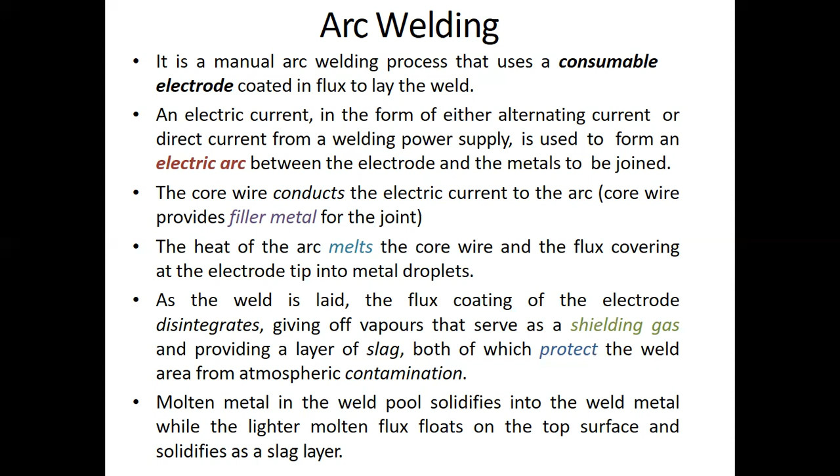That molten metal of the core wire solidifies into the weld metal, and the lighter molten flux floats on the top. Because the weld metal is dense, it will come down. The flux will stay at the top because it is lighter, and it solidifies as a slag layer. So that can also be removed later if required. Okay.

So to summarize what you have learned so far, arc welding is also known as stick welding. That is another point to note. It is called stick welding because we are basically using a stick, an electrode. It uses an arc between a covered electrode and a workpiece. That's what we have discussed.

The arc is between the electrode, which is covered with flux, and the workpiece. One is positively charged and the other is negatively charged. Shielding is obtained from decomposition of the electrode cover, that is, the flux. And pressure is not used. We are not using any pressure, are we? No. In this particular arc welding process, there is no pressure used at all.

Because in the definition of welding, we have seen with or without use of pressure, remember? So we are trying to emphasize that no pressure is used here in arc welding. Other point is filler metal is obtained from the electrode itself, right? The electrode has a core wire that is basically the filler metal around which you have the flux, right?

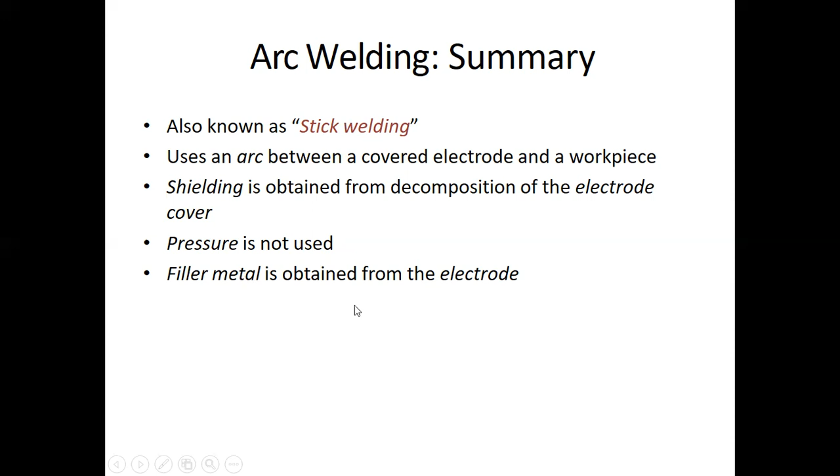You see the principle of arc as we have explained already, we have seen a suitable gap is kept between the workpiece and electrode. That is what the responsibility of the welder is. That he has to maintain a certain gap so that arc is generated, right? How is that arc generated? Because of the high current that is passing through the circuit. What is the circuit?

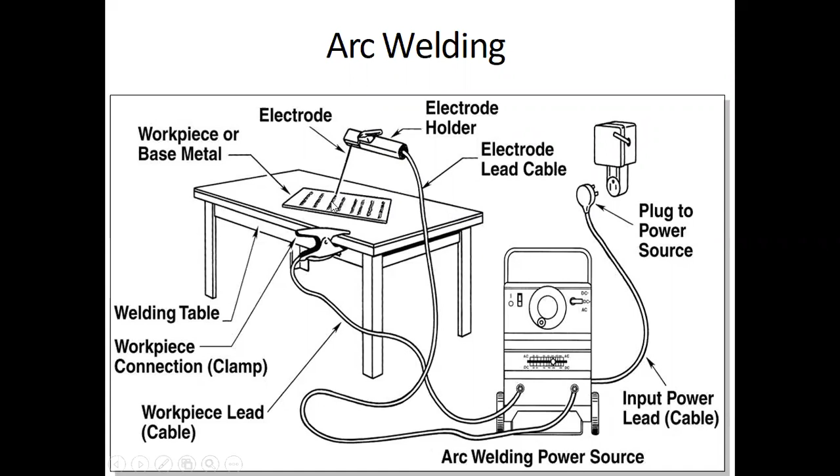Your electrode, from the electrode to the workpiece, right? From positive to negative end, right? The current has to pass. So to close the circuit, you have to ensure that that gap is maintained, right? If the gap is there, to close the circuit, the current has to jump, right, from that electrode to the workpiece. That's what the circuit means here.

High current is passed through the circuit. The electric energy is converted into heat energy, right? Producing a temperature of 3000 degrees centigrade to 4000 degrees centigrade. That's the temperature that is achieved because of the arc. Okay, this heat melts the edges to be welded, right? And molten pool is formed. On solidification, the welding joint is obtained, right? That's the principle of arc, and basically the summary.

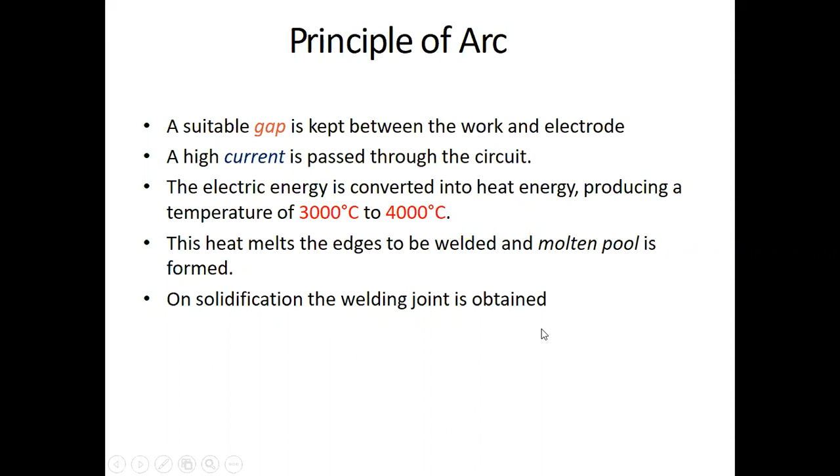A closer look at the arc welding process, you see, this is your electrode. As I said, the surface is your coating, flux coating. The inside is your core metal, right, filler metal. And you see here, arc is formed here. This is your base metal. The arc is formed between the electrode and the base metal. And this molten weld metal, the core wire which is inside is responsible for supplying this molten weld metal, right? And even the base metal would also melt.

Two things. Okay. Here you see they are going from left to right. So this is already welded. You have solidified weld metal, right? Basically this filler metal is also there and this base metal is also mixed. And on the top you have slag, as we have discussed. The slag is because of the flux. Because it is lighter, it floats on the top. And the denser weld metal is there at the bottom. Right? That's the travel direction. That's what is there in this diagram.

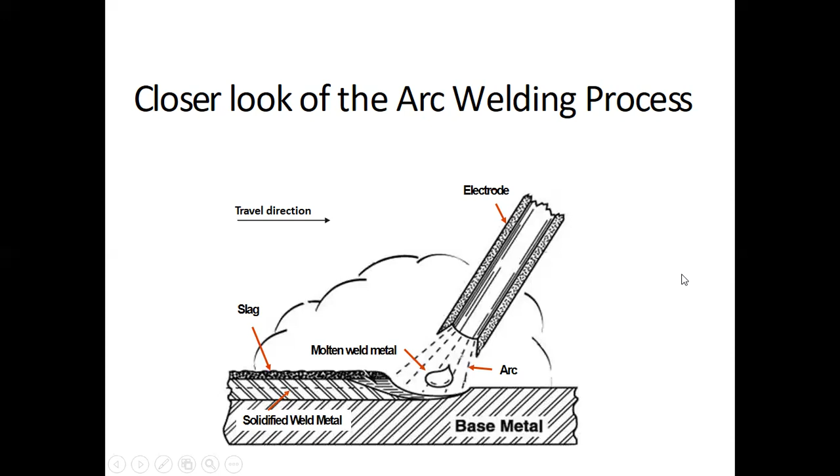The process, as we have discussed, intense heat at the arc melts the tip of the electrode. Tiny drops of metal enter the arc stream and are deposited on the parent metal, right? It's a base metal. As the molten metal is deposited, slag forms over the bead, which serves as an insulation against air contaminants during cooling, right? They will remove the slag upon complete returning to the room temperature. Until that point, it serves as an insulation against the contaminants in the atmospheric air.

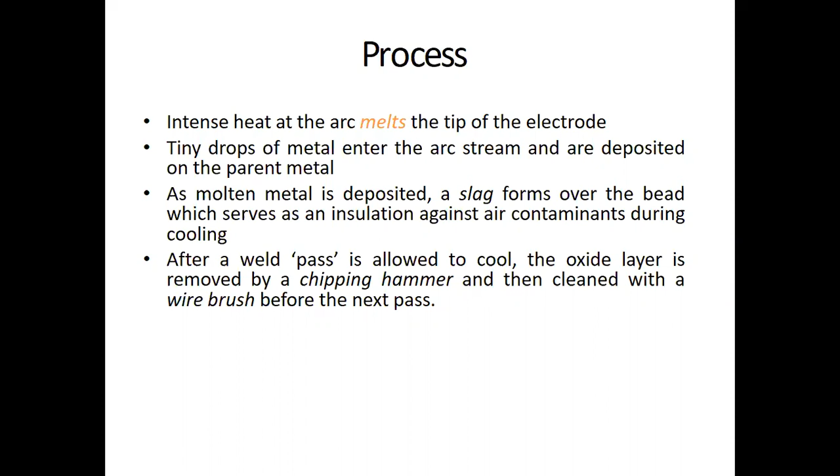So after a weld pass is allowed to cool, the oxide layer is removed by a chipping hammer. The technical name for that device used to remove the slag is called chipping hammer, and then cleaned with a wire brush before the next pass, right? We'll see the equipment also, you see here, arc welding equipment. You have the welding transformer, which supplies the current, right?

We have the electrode, this is what the electrode looks like. You can see the tip is only the weld metal, whereas most of your electrode is basically flux plus metal. At the end, you have the metal where it is being clamped in the electrode holder, right? You see, this is the point where it will be clamped in the electrode holder. This is your electrode holder, needless to say.

This is where the welder will hold the electrode holder, right? So this will be insulated of course, for the protection of the welder. Workpiece clamp, right? As I said, for connection between the workpiece and the transformer. This will serve as a grounding, right?

Protective shield for protection of the welder from the contaminated gases that are formed. Wire brush, as we have discussed just now, to remove that slag. Chipping hammer: you use the chipping hammer first to remove the slag, and then the wire brush also.

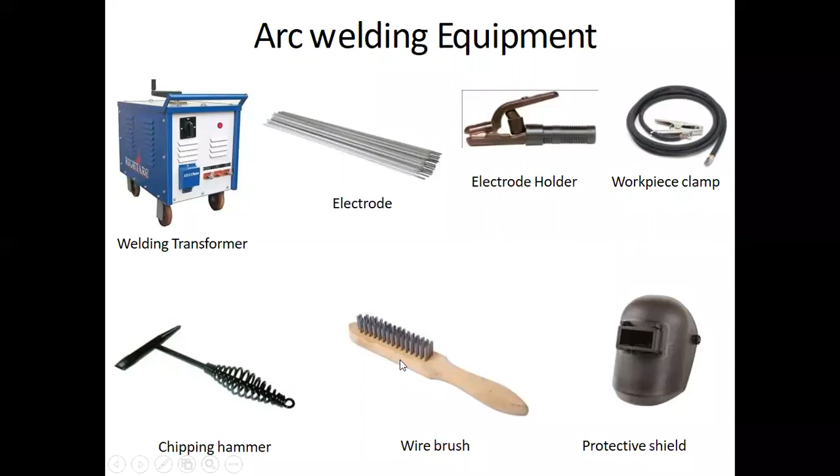Steps. What are the basic steps? You prepare the base metals, you remove the paint and rust. Why? Because if the weld metal also has these contaminants, they will serve as impurities. So it's better to remove any paint or rust or any other contaminants from the workpiece before trying to weld. Preparation of the base metals.

Choosing the right welding process for your particular application. Different processes are there. You have to select based on the material, the geometry, the cost of the equipment that you can afford. Choosing the right filler material also, what filler material to use. Assess and comply with safety requirements. That is one general rule.

Use the proper welding techniques and be sure to protect the molten puddle from contaminants in the air, because that will serve as impurities and it will lead to heterogeneous properties. The properties will not be uniform all throughout the component. Inspection of the weld at the end.

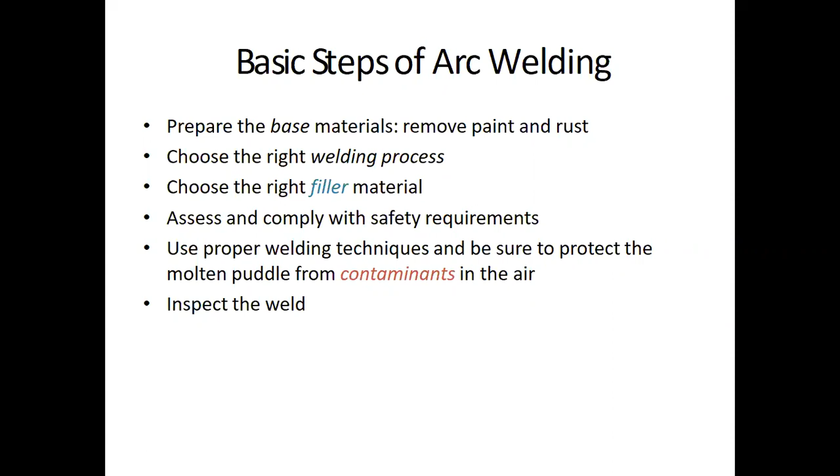So where do you get the electric power for welding? It could be either AC arc welding or DC arc welding. So AC, alternating current: instead of 220 volts at 50 hertz, the power supplied by the transformer is around 17 to 45 volts at current up to 600 amperes. This is for AC arc welding. For DC arc welding, DC machines are made up to the capacity range of 600 amperes and a voltage in the range 45 to 95. So two kinds, either AC arc welding or DC arc welding.

Just a little comparison. As compared to alternating current arc welding, the direct current arc welding has these points. It is less efficient as compared to AC arc welding. Power consumption is quite more for direct current because the current would be stable. It will supply the same current; it will not vary as in AC arc welding.

Cost of equipment is more here. Low voltage, and therefore a safer operation, a positive point of one sort if you look at it from that perspective. Because of the low voltage, this is quite a safer operation. Suitable for both ferrous and non-ferrous metals. Preferred for welding thin sections.

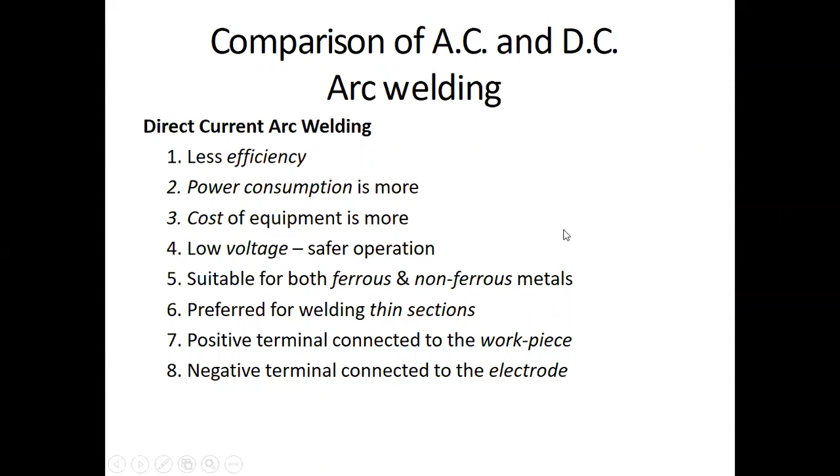Types of electrode. Choice of electrode depends on a number of factors, including these three. Your weld material is one factor. The welding position is also one factor. The desired weld properties after you have got the weld is another factor. So the type of electrode would depend on these three factors, just to name a few.

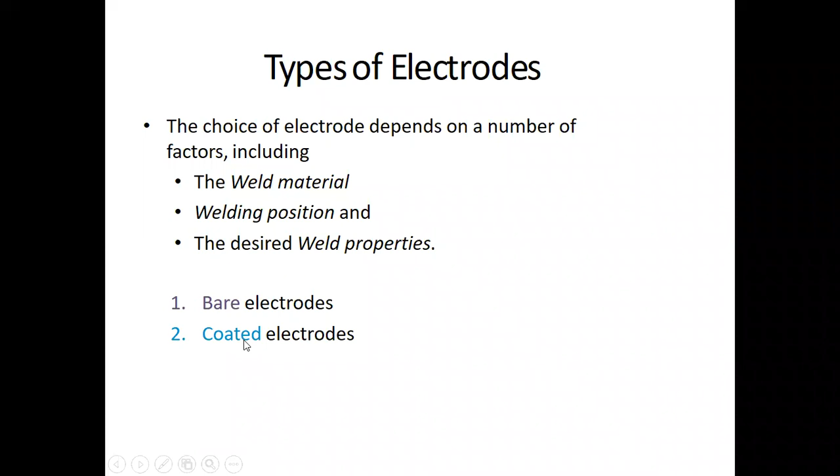So if you look at the category, there are bare electrodes and coated electrodes. Bare electrodes are without any coating, no flux at all. Coated electrodes will have coating. Welding action of a cellulosic coated stick electrode: this is your electrode as we have seen earlier. This is your flux coating. This is where it will be held in the electrode holder.

So we have seen this diagram earlier. This is your slag floating at the top. That's your weld deposited. Projecting sheath or miniature crucible. So this will serve as a protection, a gaseous shield, as we are seeing. This flux is responsible for generating that shield.

We are calling this a miniature crucible because it is basically supplying the molten metal. This core wire is supplying the filler metal. So that is why we are calling it a miniature crucible, because it is supplying the molten droplets.

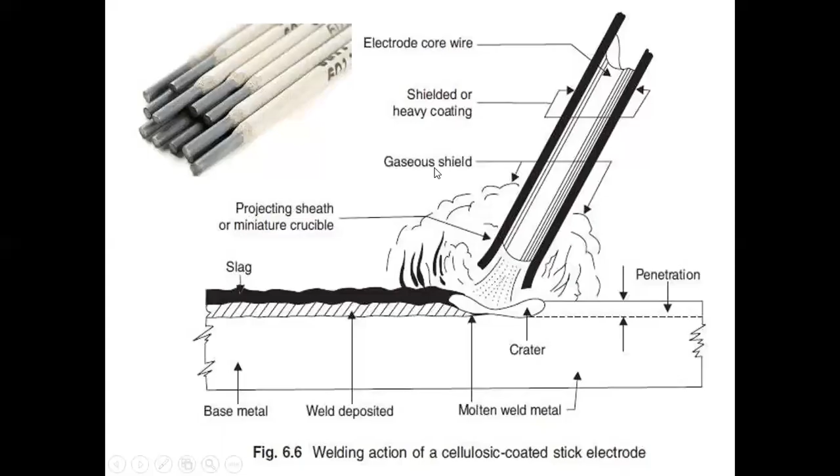Any other thing? Shielded or heavy coating, as we have already discussed, electrode core wire, right? As I called it, core wire, right? Applications, if you want to see, we have, you see the towers that are there.

Cellular towers also have to be welded. Pressure vessels have to be welded, right? You see that pressure vessel in your oil and gas industries and all these food industries, right? So they require this kind of vessels. So they are to be welded, right?

And these are also structures, right? Steel structures, a good example in the context of civil engineering, right? So they're preparing those structures. These are to be welded, right? Those members are to be welded. Cross members are to be welded to this main frame, right?

And automobile, as I said, BIW, the outer body of the car is to be welded at several points, right? And even these pipelines, as we have seen here. If the thickness is quite high, then they will use that type of welding, right? And grills, so this is basically more of a general application, right?

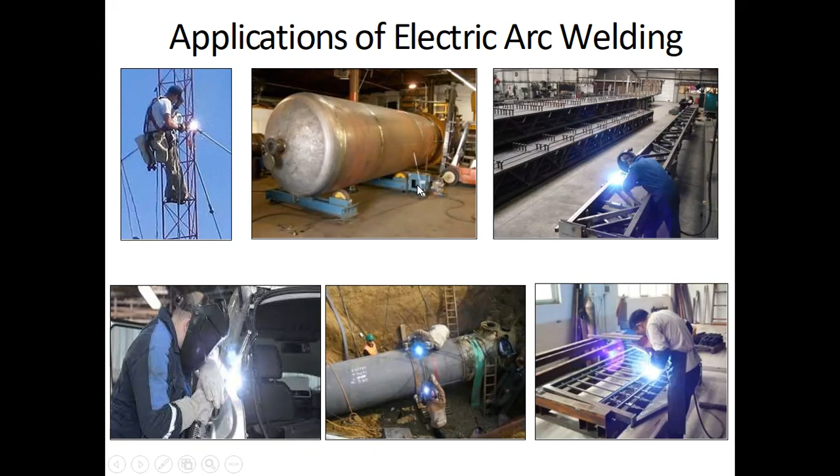The advantages: it's a simple welding equipment, it is portable, even the transformer can be taken from here to there. That's what makes it portable. Inexpensive power source, right? Relatively inexpensive equipment. Welders use standard domestic current, right? The users have to plug in to the power source, right? The process is fast and reliable. So you get that arc as soon as you switch on the power source, right?

It's that simple. It's reliable, short learning curve, right? The welders can learn it. I mean, the one who is trying to weld will not have a hard time to learn how to weld, right? Especially arc welding is what we're looking at, right? So the learning curve is quite short. The welder or the person responsible will learn how to weld quickly.

Arc welding equipment can be used for multiple functions, right? Electric arc is about 5,000 degrees centigrade. Even those ranges can be achieved. Used for maintenance, repair, and field construction, right? Maintenance, for example, something has broken down and has to be fixed. How do you fix that? Arc welding, right? Repair and field construction also, right? Very specific application.

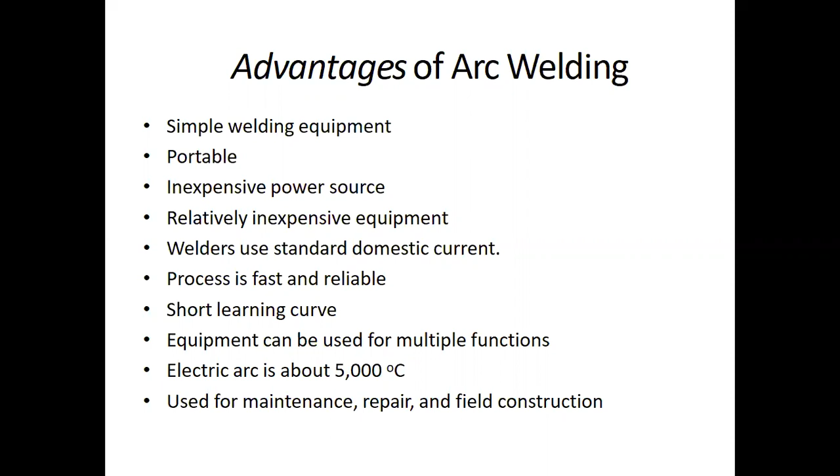Disadvantages: it's not clean enough for reactive metals such as aluminum and titanium, right? Just as gas welding was not suited, this is also not suited to reactive metals like aluminum and titanium. Deposition rate is limited because the electrode covering tends to overheat and fall off, right? The deposition rate is limited.

The amount of metal which is deposited from the electrode to the component to be welded is limited. The deposition rate is limited because the electrode covering tends to overheat and fall off, right? That electrode covering would fall off because it has a lower temperature, right? This is why the deposition rate is limited. More metal is not being deposited because of the covering tending to overheat.

Electrode length is almost 35 cm and requires electrode changing, right? It lowers the overall production rate. So that electrode has a particular length, right? It cannot be so long. I mean, you cannot have a longer electrode, right?

Because of handling reasons. So it is almost 35 cm, and therefore once it is consumed, you have to supply a new electrode, right? So there's a non-productive element here, right? So that lowers the overall production rate, right? It comes off as a disadvantage.

Doubts so far? We have discussed the concept of arc welding, right? If there are any doubts, you can ask.